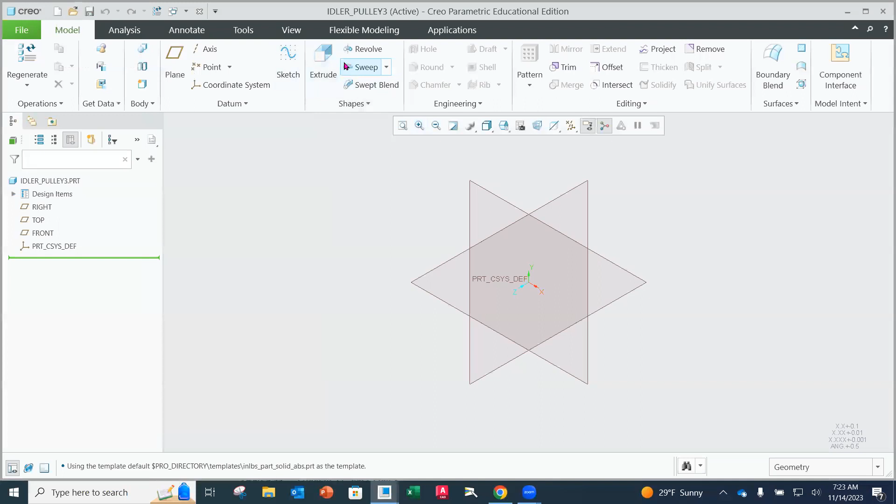So I'm already set up in Creo. I'm going to start a new part. I did set up my working directory already, so make sure you do that before you get to this part. But I'm going to call this idler pulley 3. Okay. And I'm going to go in underneath my revolve, define, front plane, and sketch. Then I'm going to create my profile over my center line. Make sure you put the center line in first, and it's the datum center line, not the sketch center line.

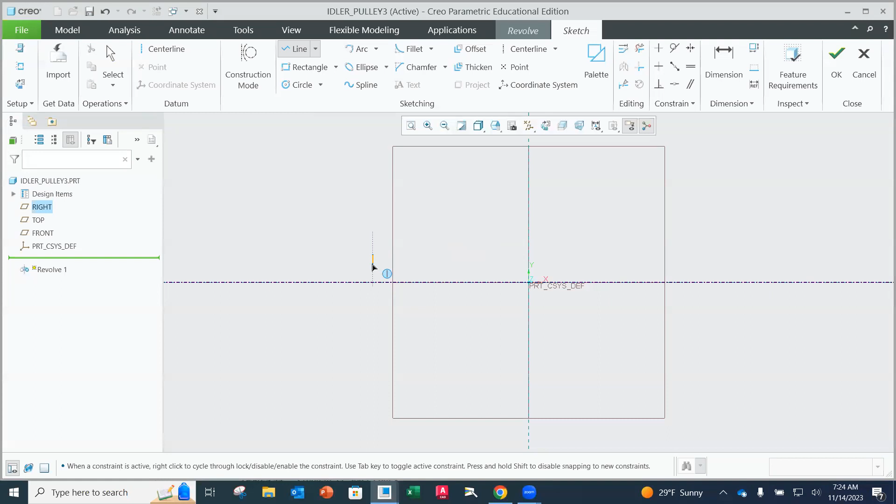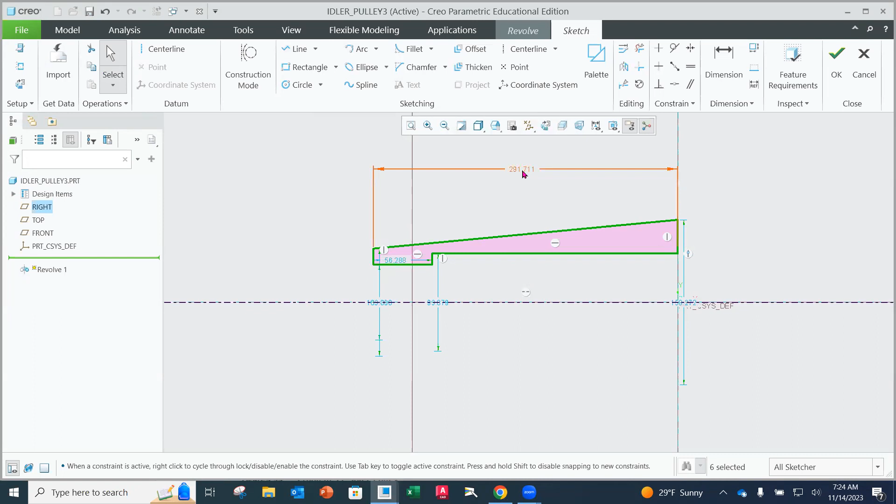And I'm gonna start like over here, and I think I'm gonna go this way. Try to make it as easy as possible. Now try to make these their own independent features, if you would, so that we don't have the additional constraints that Creo tries to help us with, right? Creo is so nice that they do, but they don't need to. So we'll put in the ones that we need. I'm going to try to be strategic here, because we can get our sketch to fold over. And if that happens to you, it's okay. We just got to kind of straighten it out.

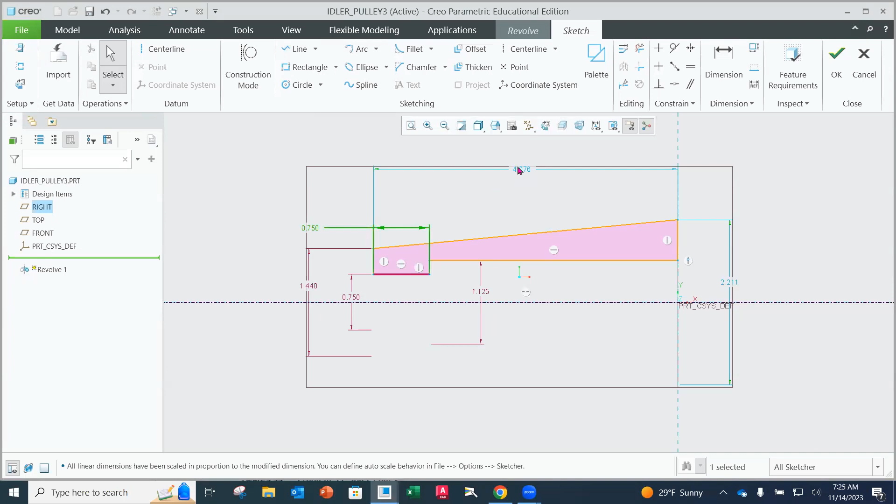But I'm going to start by adding my 1.44 on the left-hand side. Then I'm going to kind of gradually, this is 0.75. This is 1.25, 1.125. Oops. Right again, 1.125. There we go. This is 0.75. Okay. The total length. Now I don't have a total length, but I do have a dimension from here to here, which is going to be 2.88. There we go. And then the outside diameter here is going to be 1.56.

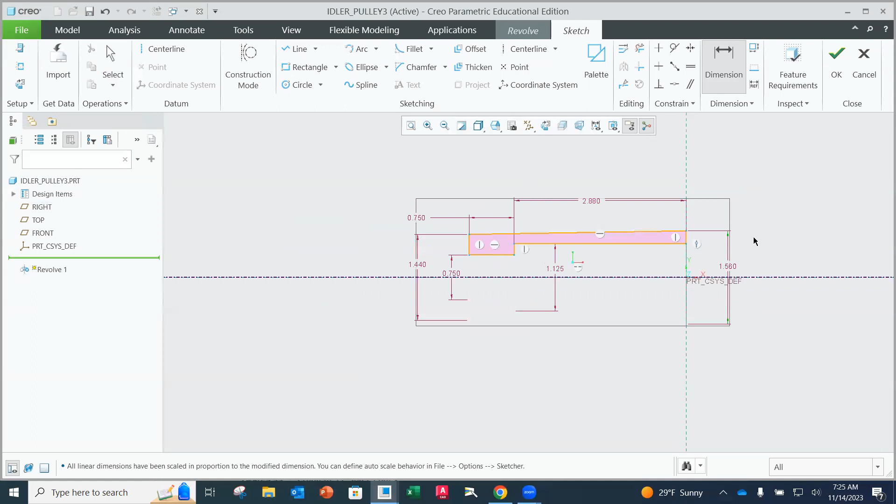Okay. All right. So that is our sketch. Just double checking. I got 3/4, 1.44. Yep, 3/4, and then 1.125. Cool. And I have a closed loop here, so this is all good. All right. Now I'm going to add back over here. So I've got my tube in place, or this portion right here. I'm going to add the part going up, and I'm just going to simply come back down with this, because I can't add in the radius till a little bit. Okay. So we'll see how that goes in.

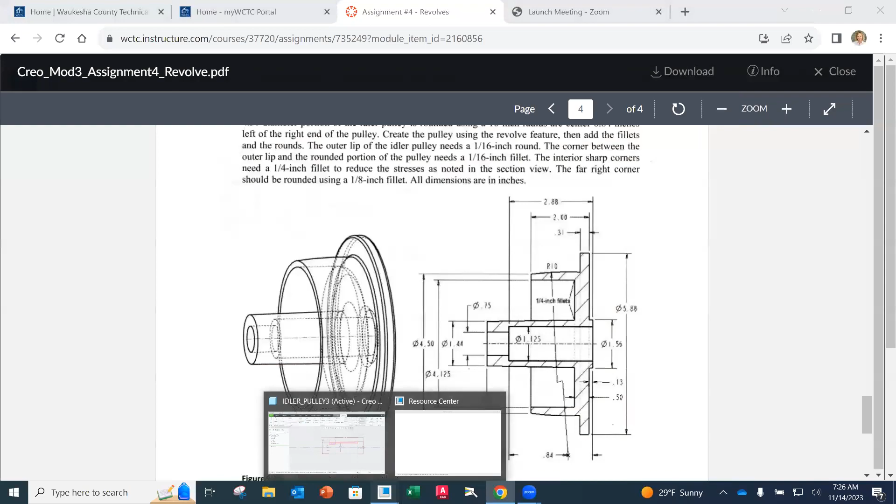Go back to Creo. All right. And I'm going to start with a line command, and I'm going to be offset from that front. Okay. I'm going to add a dimension in. That's the 0.13 dimension, but I'm going to be right about there. I'm going to go straight up and down here, straight up. I don't want any equals here. Look at how it's trying to grab the equal sign. No. I'm going to go over, and then I'm simply going to go back down here.

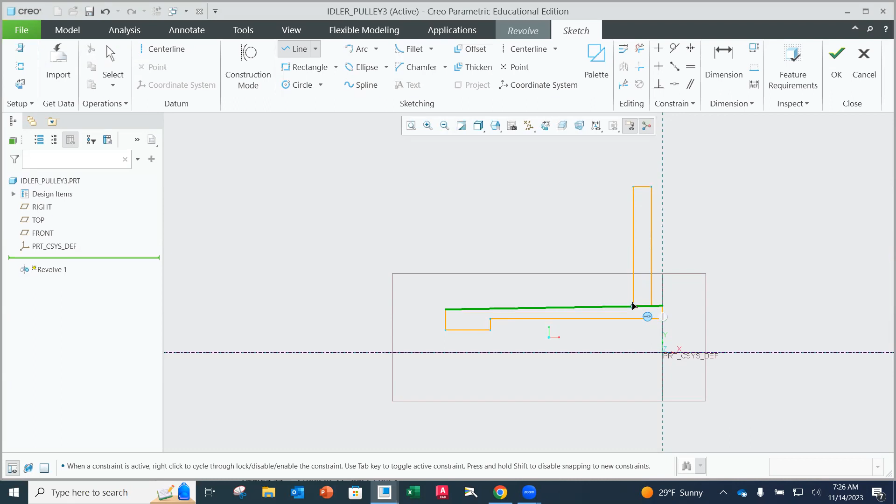Okay. For right now, let's start adding our dimensions. This is going to be 0.31. So you don't have to create that whole profile all at once. Not necessary. And then my dimension is going to go from here to here. It's going to be 0.13. There we go. And yes, it's kind of mad because I don't have this open yet.

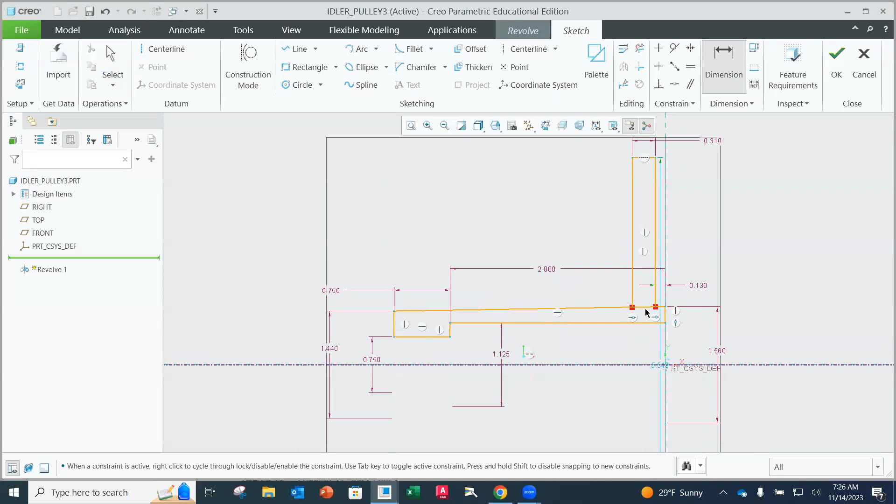All right. I will. I'm going to leave it there for right now. And then I just need to grab the outside diameter. See, where are you? Outside diameter. And this is going to be 5.88. There we go. Okay. So for right now, this is good. So we have kind of this part here, 0.13, 5.88.

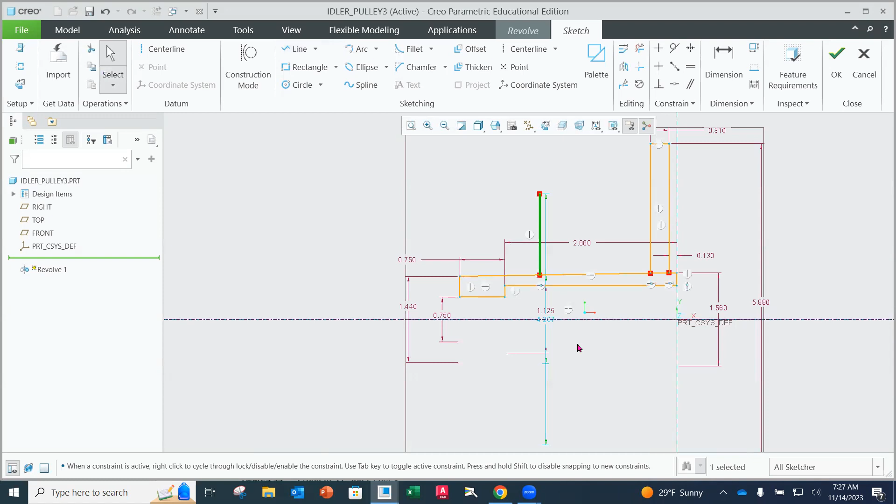Now I'm going to add in this right here, okay? And so the next thing we're going to do is I'm going to add in a vertical line. Now this vertical line will disappear, okay? Now let's look at how it's coming in. Yeah, I'm not worried about that dimension. So this dimension right here is going to be the 4.5 diameter, okay? 4.5 diameter.

Now that point, I'm going to put it in place in just a bit. That is going to be this point right here. It's just going to be a line going straight up for right now, okay? Then we're going to add in this part. And then that's where our radius of 10 is going to be anchored, okay? So I'm going to be putting in this diameter right there. It is going to be an open profile, so don't worry, but we're going to have that point out there identified.

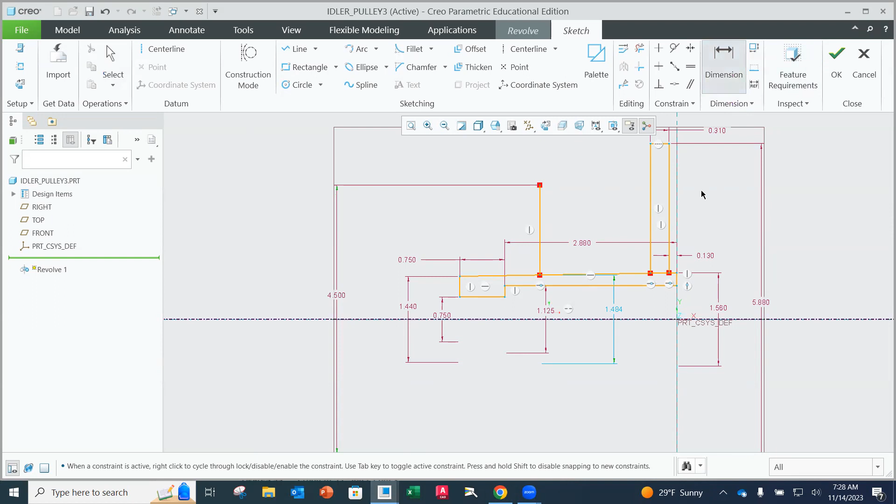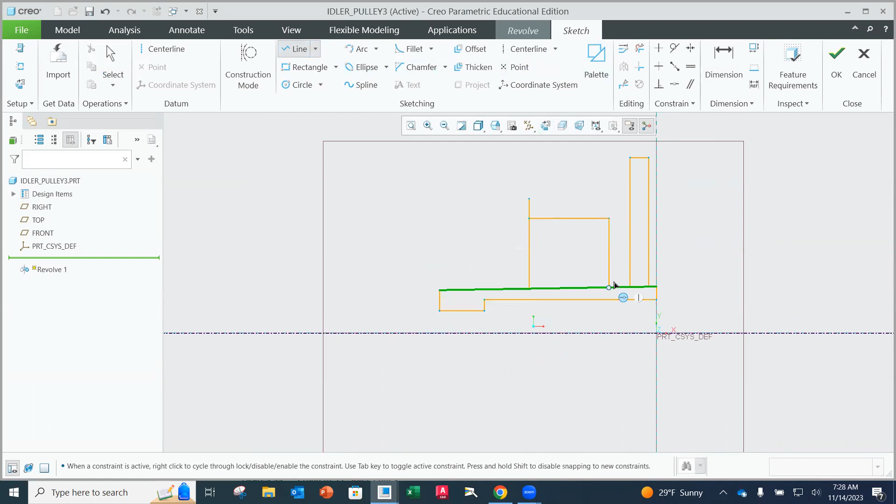We also know that we have a dimension from our front face to here, and that is 2 inches. Okay. All right. Then I'm going to add in another line that's just going to be right down here. It's going to go over and it's going to come down there. Okay, that's that inside portion. And I know how deep that is. No, not that dimension. From here to here is 0.5. It's towards the bottom of our drawing.

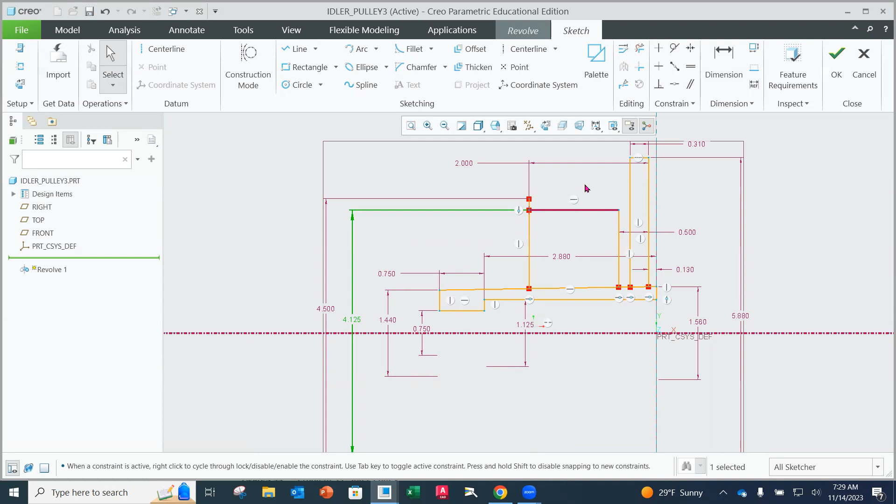And then this diameter right here is 4.125. Okay. All right. So we're just going to leave these hanging out right here. So we've got this, we've got that. Good. We're going to leave this one right here. Now we're going to put in this radius. So first things first, I need to create that radius.

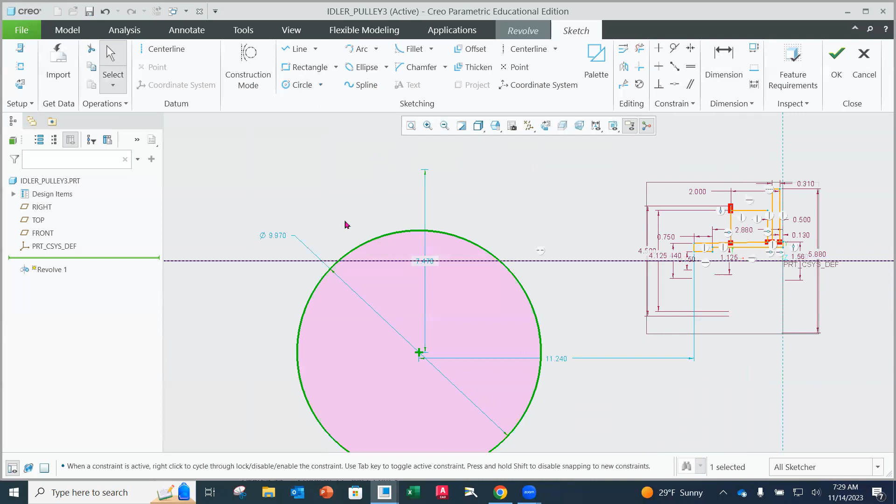What I like to do is shift middle mouse button over here. And I'm going to do a circle. It's going to be something like this. Okay. And this diameter is going to be actually 20 inches because it's a radius. I'm going to change this diameter, left click on it. I'm going to change it to a radius of 10. Okay. And now it's dimensioned it from our origin, right? But that's not where we want it to be from, which is okay.

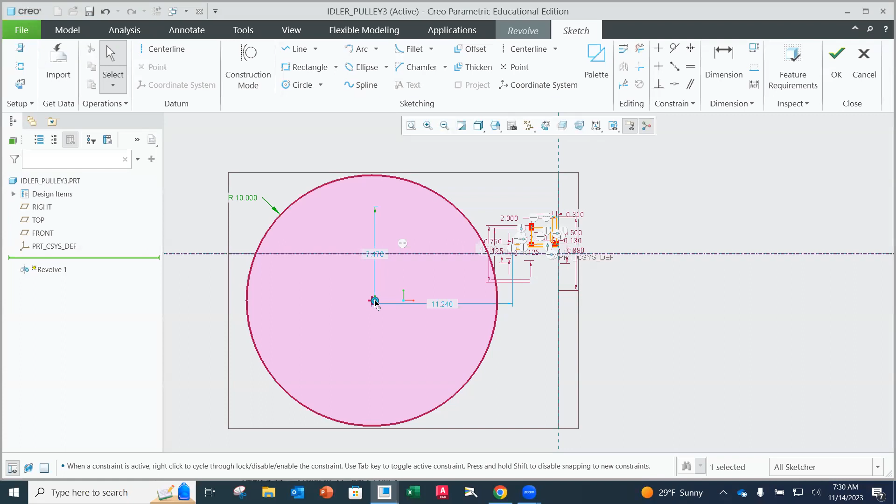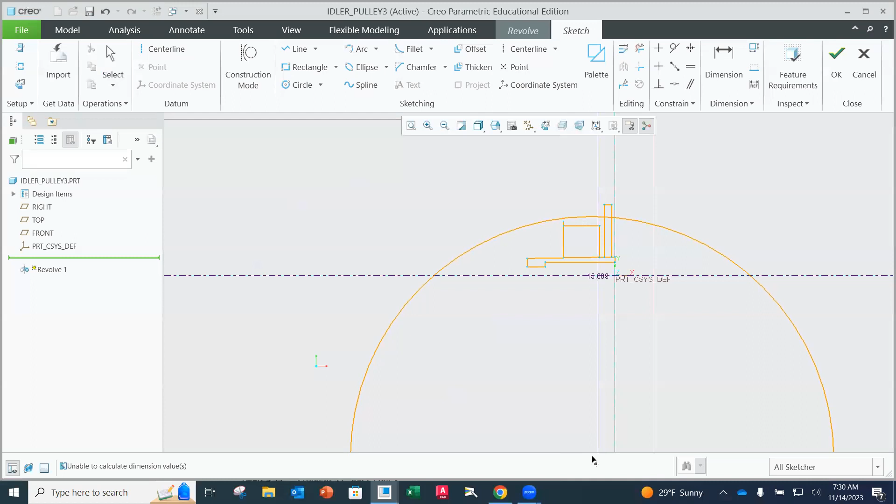So I'm going to take my center and I'm going to move it. I'm just left clicking it. I grab the center with my left mouse button, the center right there. And I am moving it over closer to my sketch. As I've said in the past, we want Creo to make as few decisions as possible. So I'm going to get closer, and try to get this so it's right about there. Do you see how I'm close to where I'm going to be going? Right about there. Just close to where we are expecting it to go.

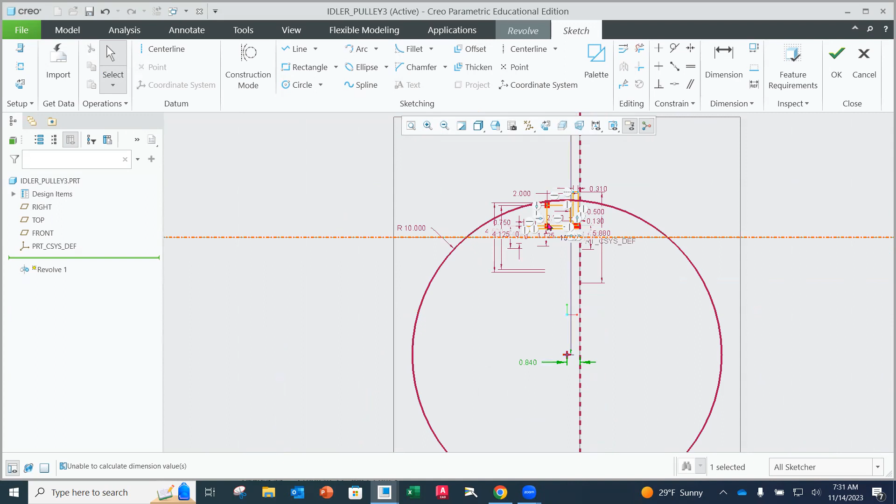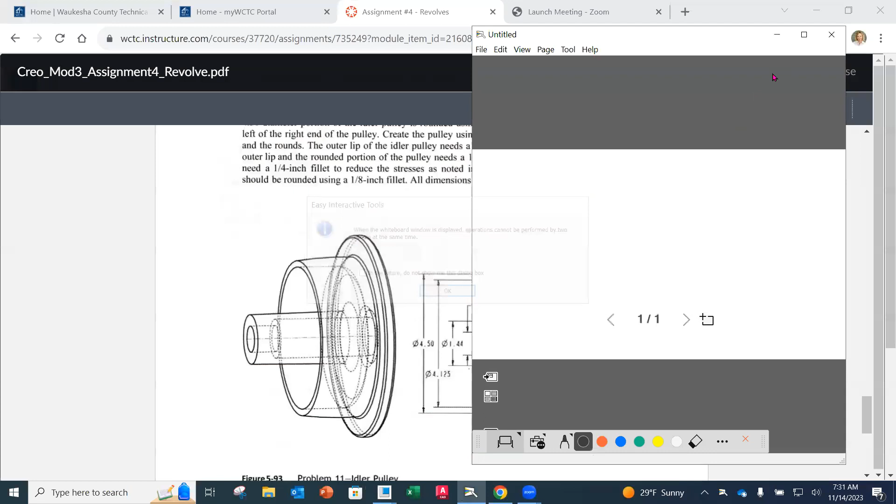Now, we're going to add this dimension right here. From our origin, we want this to be 0.84. Okay, so now that's locked in. But the other part is we want, and I'm going to go back over here. Oopsie, sorry, too many things to hit here. I don't want that. I accidentally clicked on that. This point right here, we want to be coincident with that outside radius. And that point is the top of that diameter of 4.5.

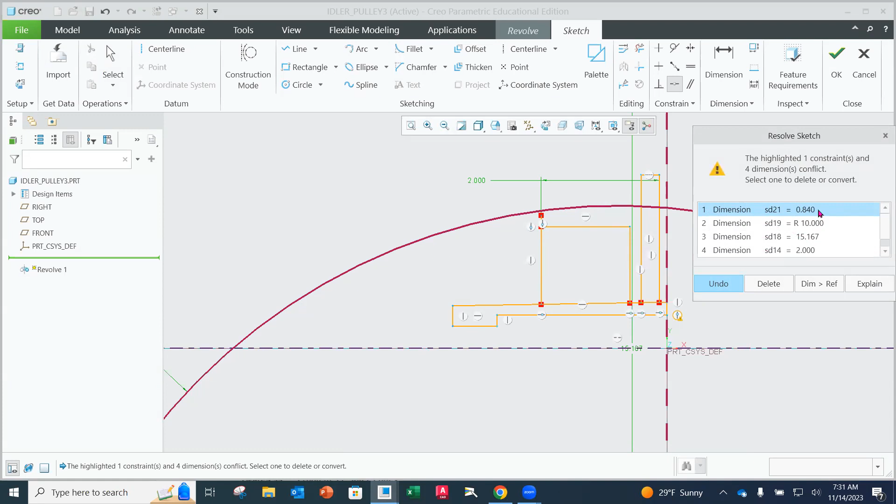So let's go back over here. We're going to go to our coincident constraint, which is the one in the middle on the bottom. We're going to click on that endpoint and click on our radius. And it's going to say, yeah, this is not a good idea. But let's go through these dimensions. So we have the offset of 0.84. It'll highlight that dimension. If I look, it's highlighting that dimension right there. That's the one that we're on. Okay, I want that one. This one is the dimension of 10. I want that one, the radius.

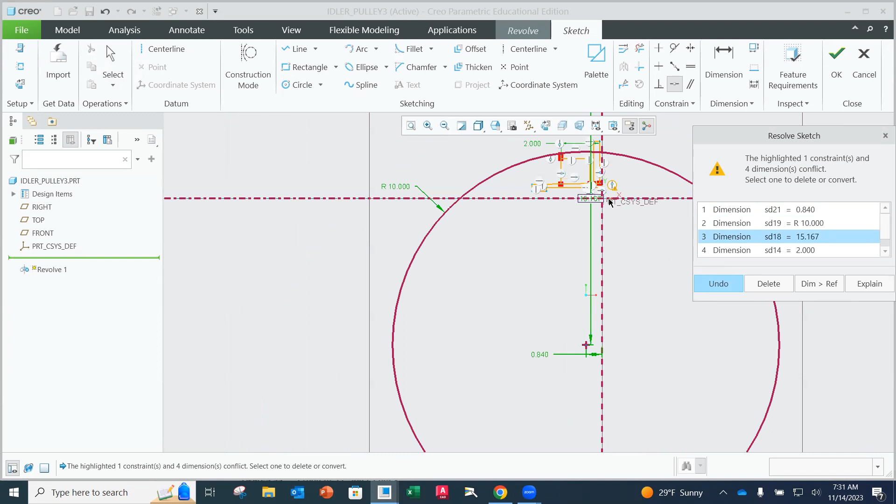This dimension right here, it's like, I don't get that one. That one we don't want. We want to delete that one. And then now it's like, oh, okay, now I know what you want.

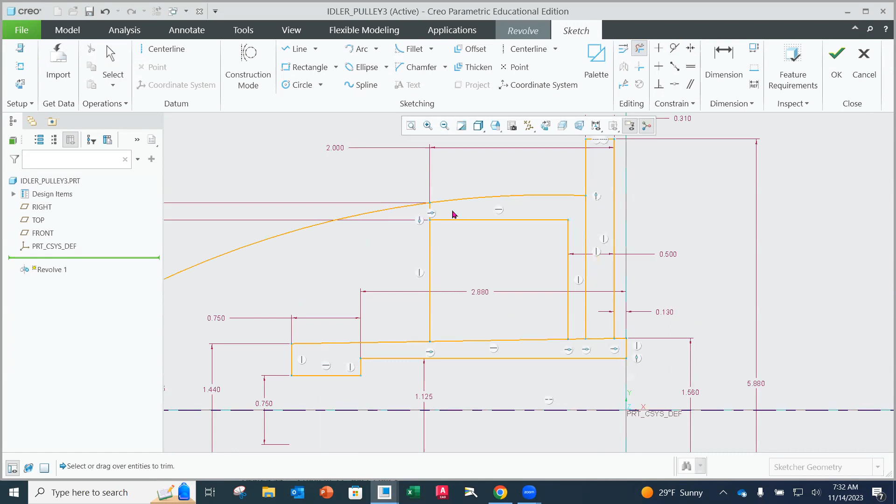So we can now trim away the parts that we don't need. So I am going to trim away this outside. I'm going to trim away this and that and that. And then there's going to be this radius left. I'm just going to hit the escape key. I'm going to select it and then just hit my delete key to not have to keep kind of going. So now we're getting close here.

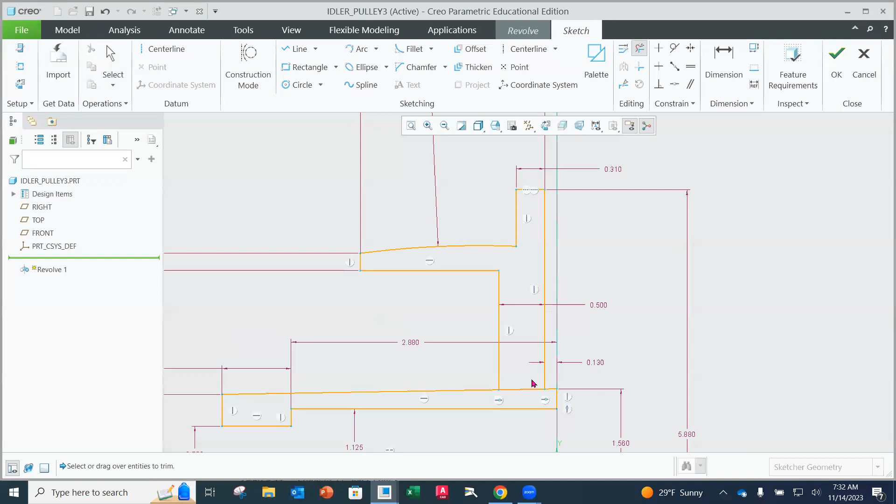Okay. So now we're going to get rid of the extra lines that we don't want. So we're going to get rid of this one and we're going to get rid of this one. Okay. And, oh, one more. We want to get rid of that one. Okay. Look at that. And now I've got a closed loop. And I'm good.

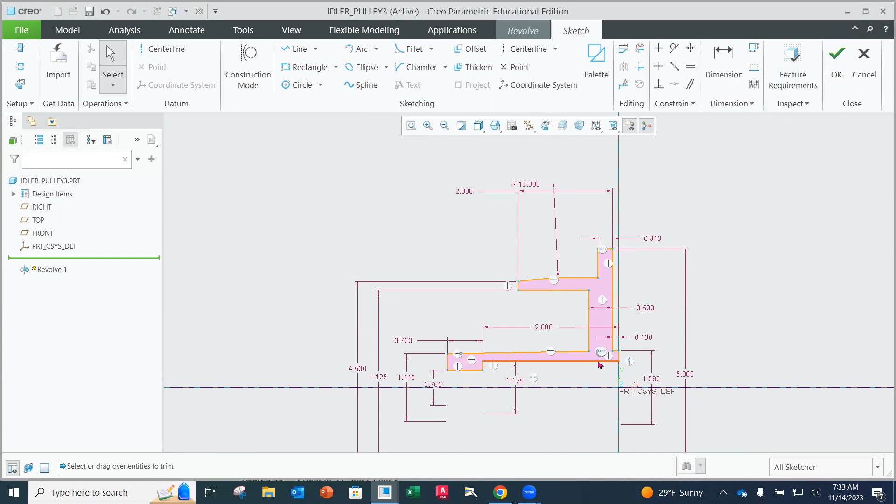Let's check our feature requirements. I've got all of my check marks. As we know, we have 5 of them for the Revolve. And so it's like, yeah, you can do your Revolve now. So I am simply going to hit okay. I'm going to leave this up for just a bit so that you can take a peek at what we got here, in case you need to kind of see where things are at. And once you feel comfortable here, you can hit your OK button. So I'm going to hit the OK button now, and it's going to do my Revolve.

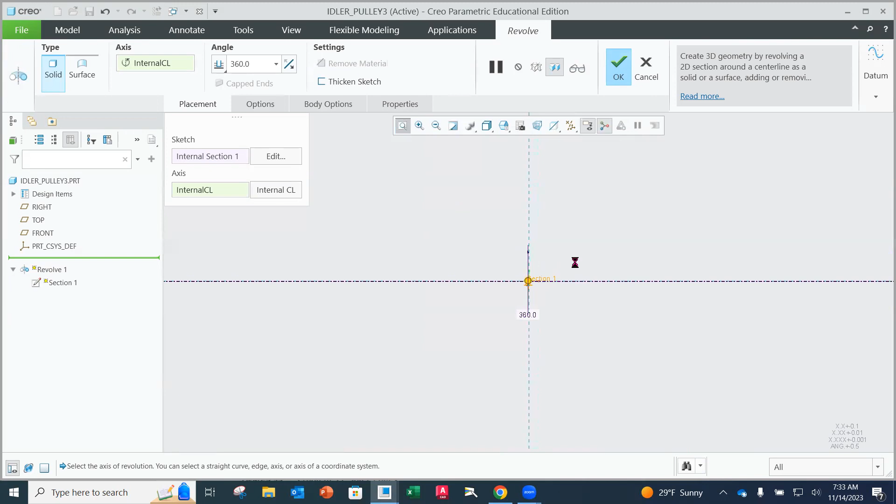So let's kind of bring this into perspective. Oh, why did that go way out there? I don't know. All right. So that did my 360 degrees, and I panned it. And then now I can see, oh, good. It did all of the features that I needed it to. So I'm going to hit OK. And now there's my part. Okay. So that looks like it was a success. So great time to do a quick save. All right. So we saved.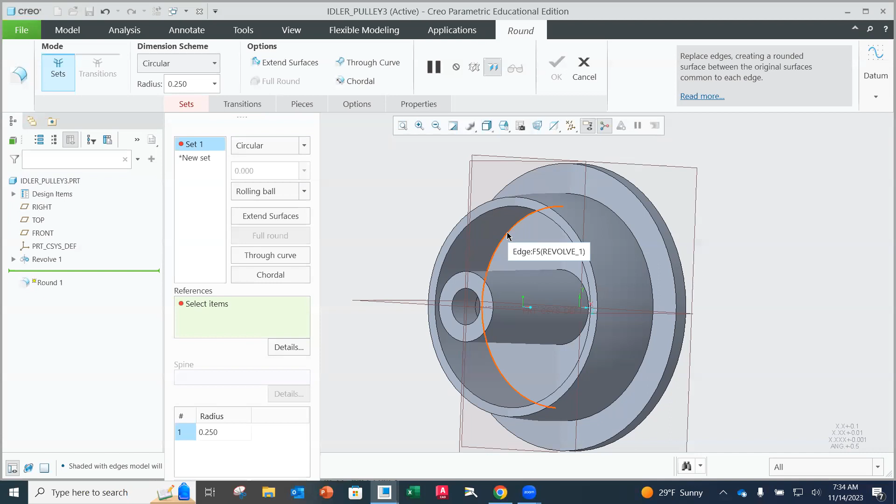Now, to see the edge a little bit more clearly, you want to go up to your display style, shading with edges. Always much more clear. Otherwise, it kind of blends it together. And I think especially for this command, it's easier to see. And I want to get on the edge. Whenever we do rounds and fillets, we want edge. We don't want to be on the surface. So make sure that you're not on one side or the other here. We got the edge. Once you have that, you can left click. And then it did that inside fillet of 0.25.

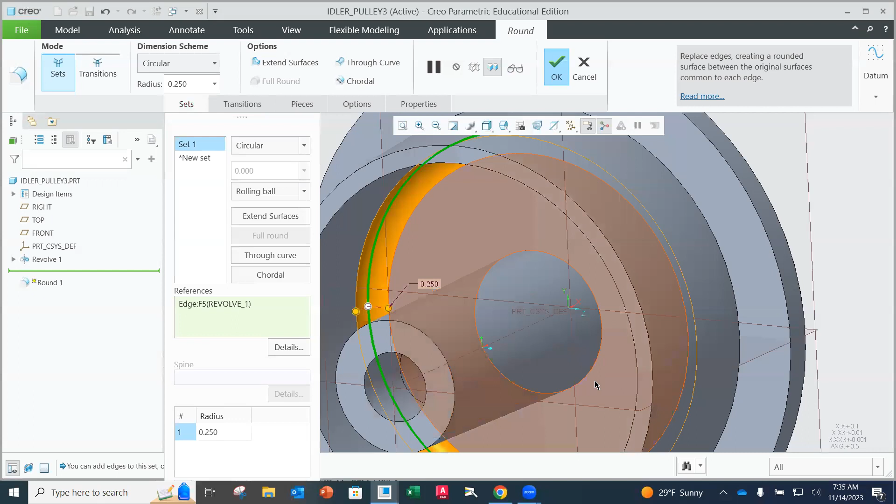Now the other one at this very same size that I want to do is going to be at the very edge here. So I'm going to click. I'm getting surface. I don't want surface. Hold on. Let me move this a little bit. And yep, there we go. See right there, now I've got the edge. And I'm going to left click. And there's my 0.25 radius on the inside. I'm going to hit OK. All right. Now I'm going to do the 1/8 of an inch.

Okay. So in our description here, oh, shoot, it's going to open that up again. I hit the wrong one. No, no, no. I don't want you. Do you want to save? No. I want to go back over here.

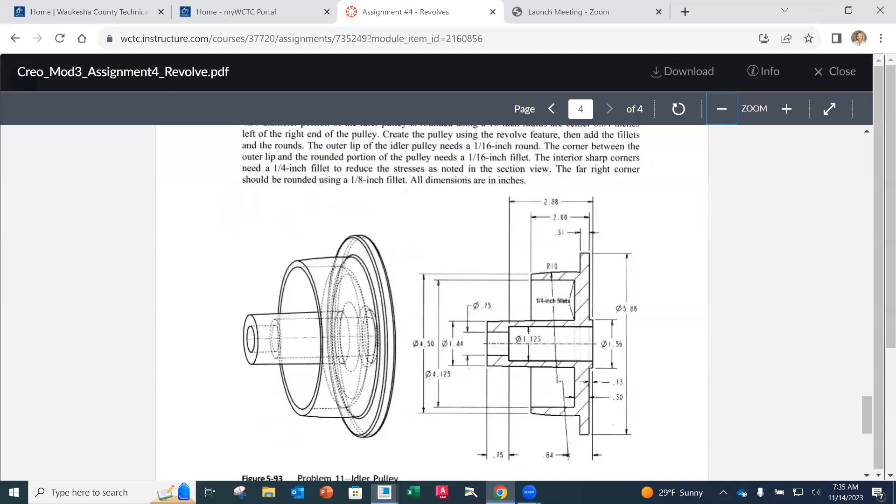Now in the description, it says that the 1/8 inch is going to be the far right corner. So the far right corner is right here. Go back to our model and I'm going to zoom in. So it's this one right there. So I'm going to go back to round. I'm going to change my radius to 0.125.

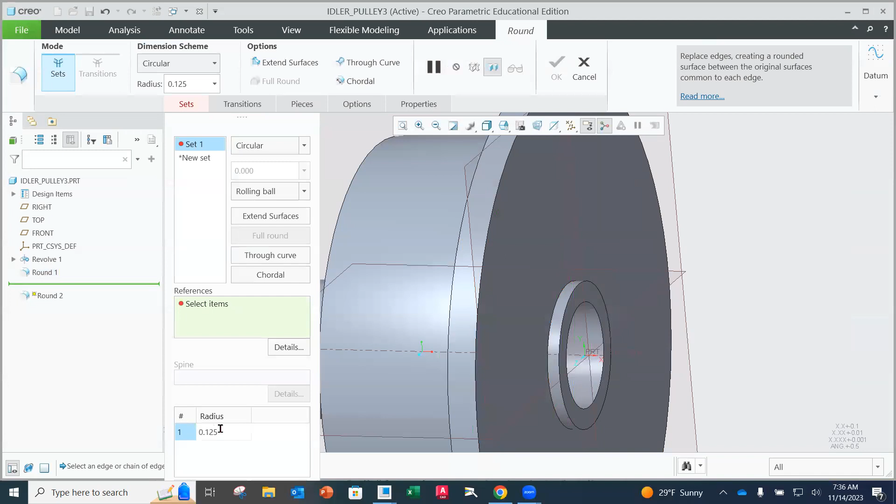Enter. And I'm going to click right there. And again, make sure that you're not getting the surfaces if you have to kind of pull around. So I'm going to kind of go like this, make sure that I've got it there. And there we go. Look at that. And that's going to be my OK on that one.

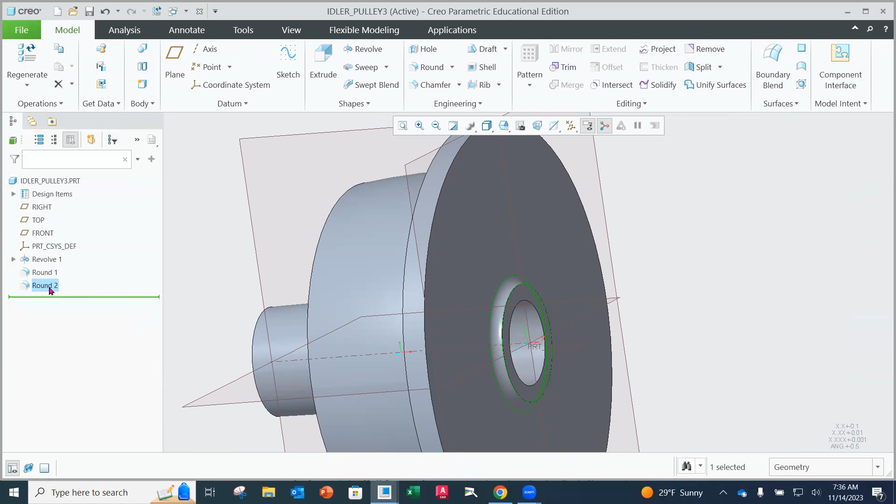I like to keep my rounds so that they're the common radiuses for each one. So notice that my first round here was number 1, number 2, and then number 3. I'm going to go in and I'm going to change these in just a bit. It's good practice to do that so that it doesn't take time to kind of hunt and peck around.

So now based on the description, let's go back and we're going to put these 1/16 of an inch in. So it says the outer lip of the pulley needs a 1/16 inch round. So that's going to be this corner up here and this corner right there. And then it says the corner between the outer lip and the rounded portion, so it's going to be this inside corner right here is a 1/16 of an inch. So this one and that one are going to be 1/16 of an inch.

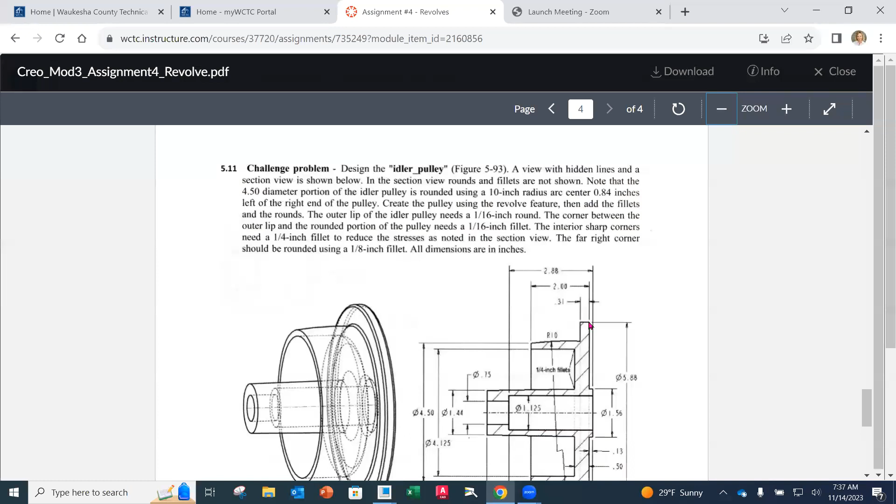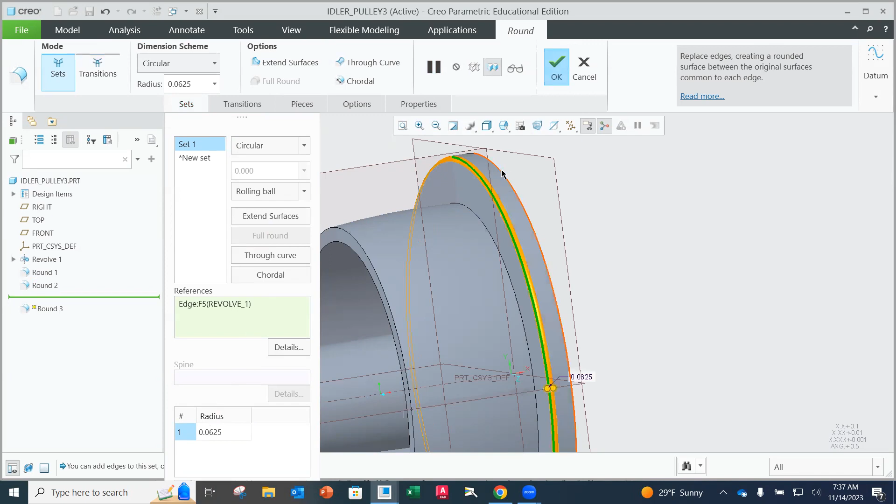So let's go back to Creo. Let's go back to the round command. And we're going to change our radius at the bottom here to 0.0625, which is 1/16 of an inch. And we're going to grab our edge of our corner outside, edge of our corner there, and our edge right there. Okay. And there we have it.

Now, as far as the model itself, I'm done. So the Revolve, I think, is self-explanatory for that profile, but these, you may want to change their name. Okay, so I'm going to double click there and I'm going to do round underscore 0.25, will that work? Oh, see, you got to be careful with these. 0.25, I don't think it likes the point. Underscore 25, I'm going to say. There we go. It likes that.

This one was round underscore 125, we'll say. And then round, oopsie. No. I want to cancel that. Round, and I just double clicked to get it into this text editing mode. This is going to be 0625. I know it doesn't like periods, and I know it doesn't like slashes. It likes underscores. So that's how we'll kind of call that out.

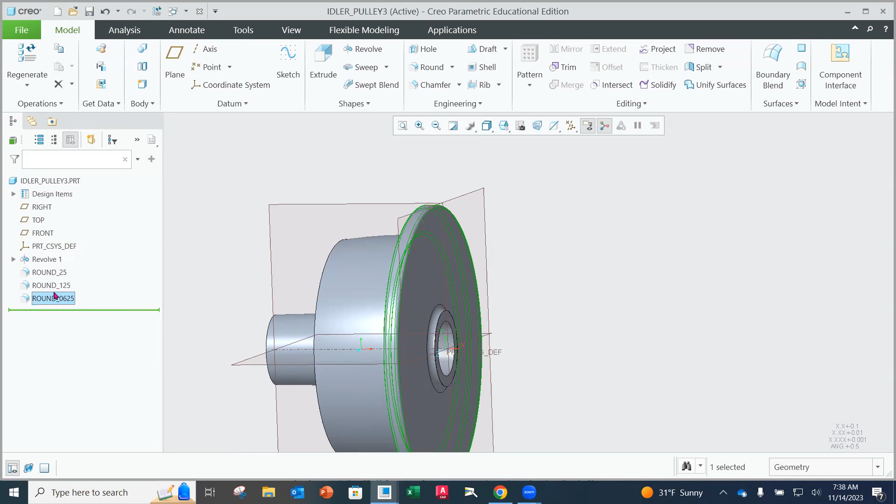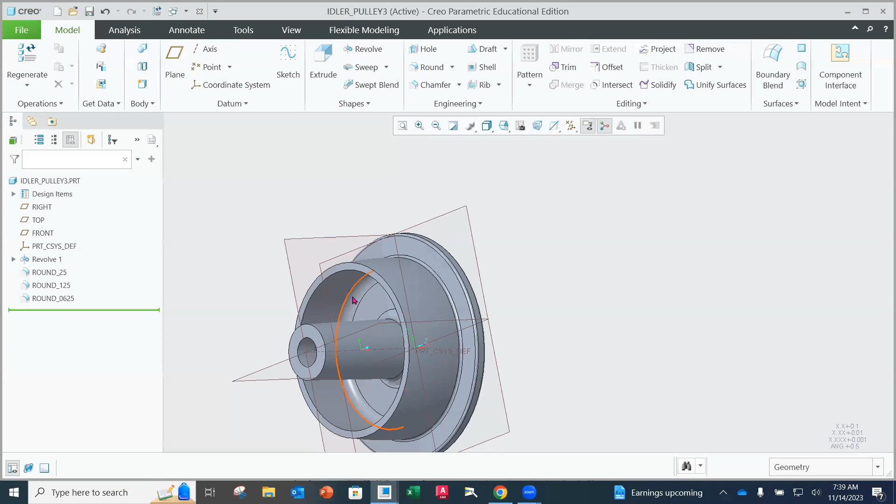That way, if somebody's going in, they're going to be changing it. And sometimes fillets and rounds are items that could change on a fairly regular basis, so you do want to identify those there. So when you are saving this, make sure we get a couple views of this so that we can see what's going on. So I would go from this corner right here so I can see that there's a radius, okay? And then rotate it around this side so that we can see the front part.

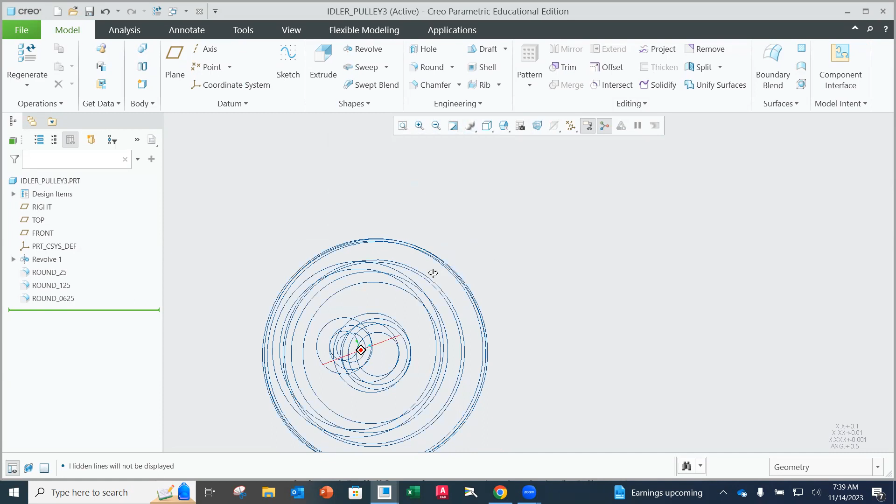And also kind of a nice one to do, especially when there's these extra things. Maybe that, I don't know if it's that one that I like, or wireframe. Wireframe's kind of crazy. Sometimes this one looks pretty good too. So use your best judgment on how you feel. Yeah, because you can see these radiuses from this view here, maybe even go like that. That would be one good screenshot, and then flipping it around this way so we can see that front one as well.

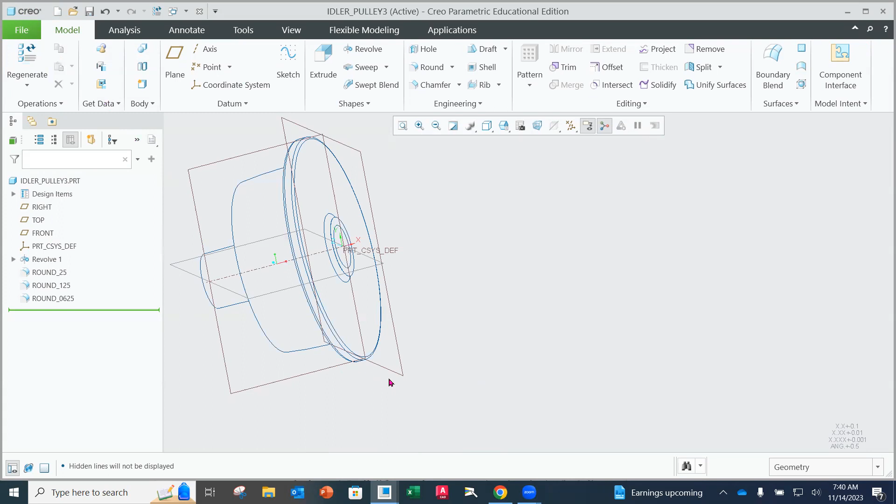Okay. So, making sure that as you are doing your screenshots that you've kind of snugged this up into the corner, and then take your screenshot of the entire corner from the upper left-hand corner of the screen down, including the design tree, and then including your model here. And again, this one will require at least 2 views to see all of those surfaces and features that you've created.

All right, so if you have any additional questions on here, please let me know, but hopefully that was helpful in kind of deciphering what the problem statement here for this idler pulley was asking for.